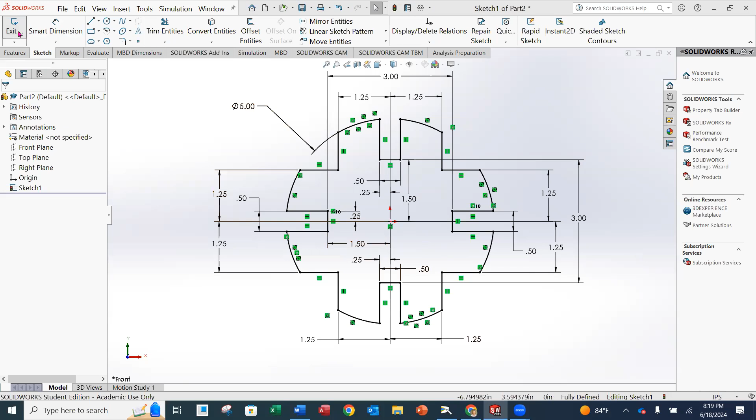Okay, I'll keep going. Okay, so now we are ready to do our extrude. So we're fully defined down here. We have all black all the way around. So now we can exit our sketch. And if you went in under the extrude command, it's going to go right to extrude. If you didn't, if you went under sketch, then you just have to reselect that sketch, go up to feature, extrude boss base, and you'll be here.

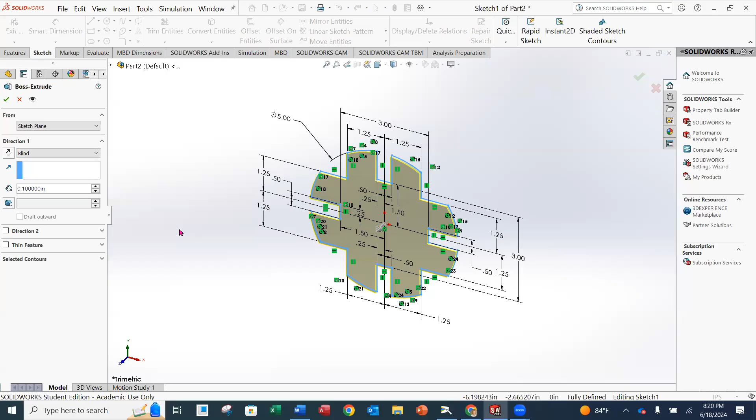So if we look back at our drawing, you're going to notice that it's 1 inch thick. So we are going to do that blind extrude, and we're just going to enter, instead of 0.1, we're going to put 1, and we'll get a preview. It looks good. And we're going to hit OK. And I'm going to select out here. And now you'll notice that we have our base feature.

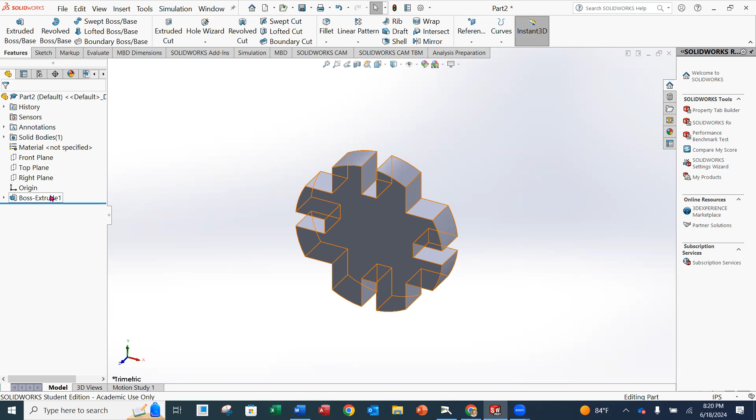So that's what I'm going to call it. I'm going to call it the base. Now you can really call this whatever you want, as long as it's descriptive of what it is. So usually the base feature is exactly that, base. So I'm going to left click on my feature, right click, and then go down to rename tree item. And then we're just going to call this base.

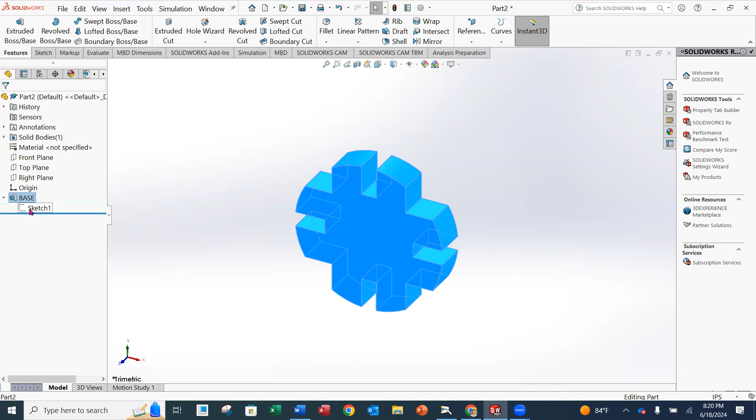Okay. And we're going to expand so we can see our sketch number 1 and that there is no negative sign in front of it. And I'm just going to left click off of the part to kind of deactivate it. So we've got our base. We've got our first sketch fully defined. I'm going to rename this. I'm going to save it for officially where I want it to go. So I'm going to do a save as, and this is called the indexing guide. So I'm going to call it indexing guide 1 and save. All right.

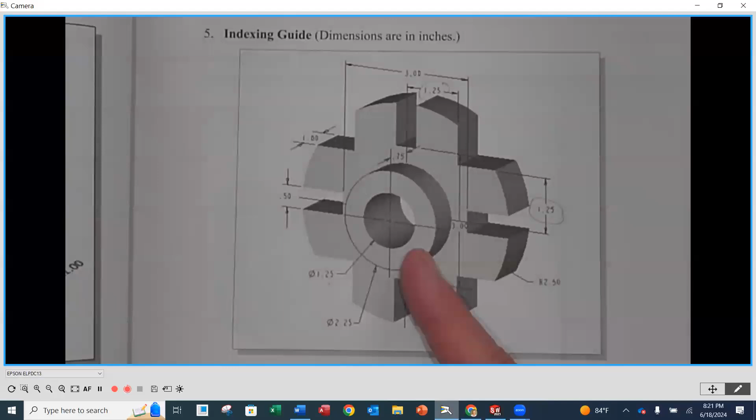So now I'm ready to do my next feature. If I look underneath, the next feature I'm going to do is going to be a cylinder that's going to be coming off of that face. And it looks like it's going to be 0.75 above that top surface. So it's a diameter, an outside diameter of 1.25. I'm sorry, nope, 2.25 to the outside diameter. So I'm going to go back to SolidWorks. We're going to do another extrude boss base because we're going to add material to create that.

We're going to select this face right here. And now we're going to grab the circle, center it at the origin. Just sketch the circle here. Hit OK. Smart dimension. Click that outside. And this is going to be a diameter of 2.25. And then OK. Fully defined because the center is sharing the same point as the origin, and it knows exactly where that is. So now we are fully defined.

We can exit our sketch. It's going to go right into extrude mode. And we want it to be a blind extrude coming off of that surface. And we want it to be 0.75. Enter. And there it is. Okay.

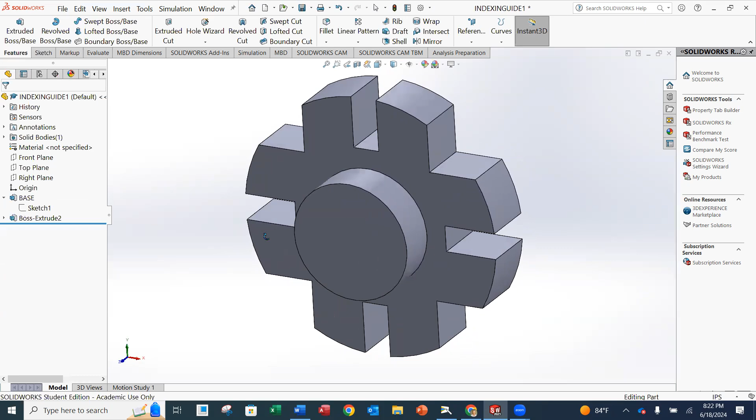Now, before we go too far, we want to expand out that feature. We want to left click on it, then right click, and we want to rename it as cylinder. I don't know, whatever you want to rename it. No right or wrongs here, just something that describes what it is. Okay. And then I'm going to do a file save.

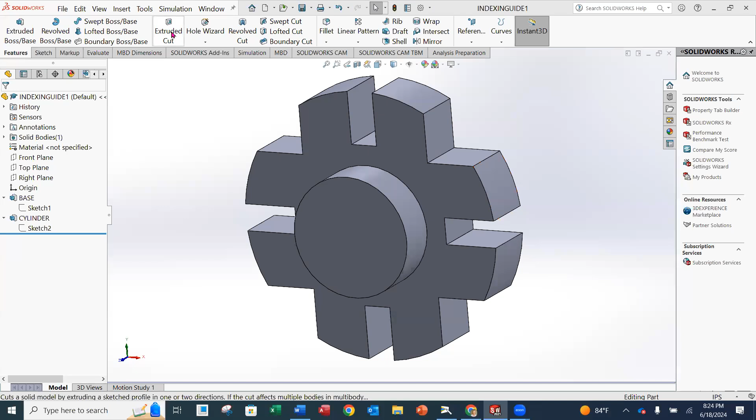Our very last feature is then going to be the hole through the center. So now if we look at the size of the hole, it's 1.25 inch diameter. We would not be able to use the hole wizard because the standard drill sizes on the hole wizard list only go up to 1 inch. So we're going to put this in as an extrude cut. So I'm going to extrude cut, pick on that top plane here.

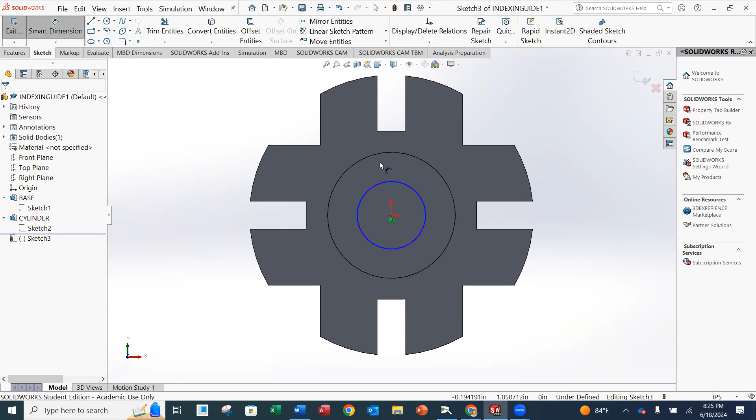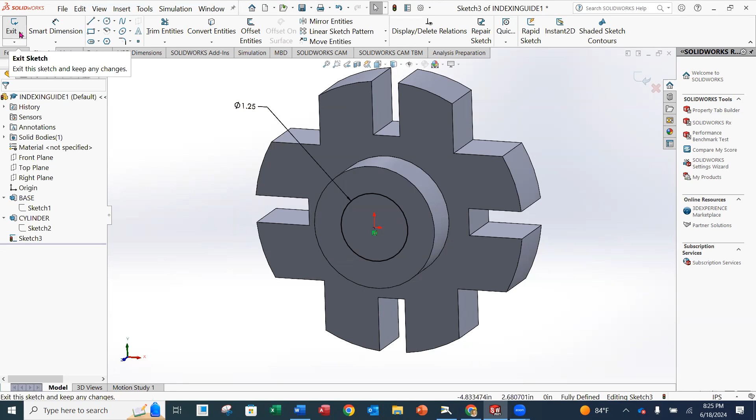Okay. And then I'm going to go to my center circle, grab the origin for its center, and then the radius. Click the OK button, smart dimension, outside. And this is going to be 1.25 diameter. And then OK. And now you'll notice if I rotate this a little bit, it's on that surface, so I'm fully defined because the location shares the same center as the origin. Then I've got my diameter of the hole dimension, so I can hit escape.

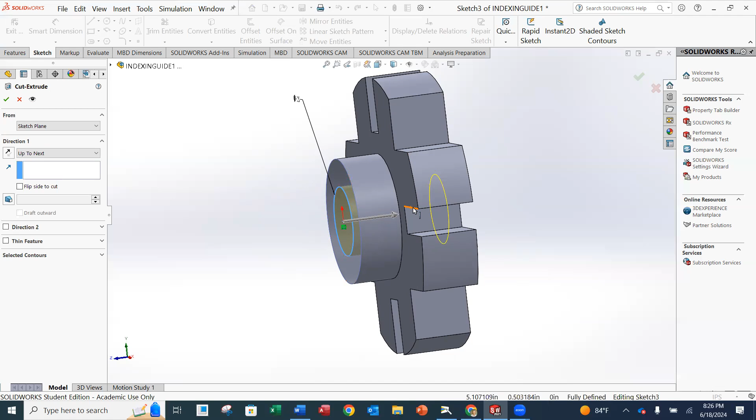And now I went in underneath the cut command. So it is saying up to next. Up to next or through all would be really the very same thing. It wouldn't. No, it's because remember we merged the results, so in this case, up to next and through all will be the same thing. But if you had intermittent steps, potentially it wouldn't be. So that's why you always want to kind of rotate it and make sure that it's there. So whether you pick up to next or through all, it remains exactly the same.

Okay, so I'm going to hit okay. And you'll notice that we now have our final part. So before we're done though, we want to expand this out, make sure it's fully defined. And then we want to left click on the cut extrude, right click to rename. And I'm going to call it the through hole, enter. And then I'm going to left click off of that. Make sure my sketches are expanded. You do not need to rename the sketches, just the features themselves.

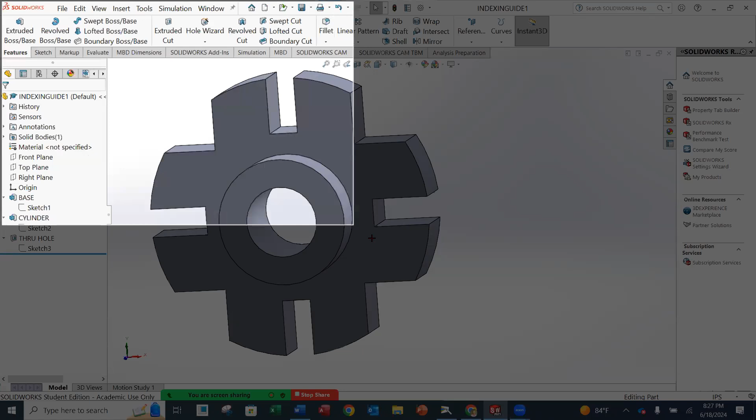I'm going to hit control, hit my middle mouse button, slide this over. Make sure you position it so we can see all the features, right? So I can see that the hole is through here, that we've got thickness. And then I'm going to do one last final save. I don't have an asterisk up here. And then I'm going to do my Windows Shift S, upper left-hand corner, and make sure that you grab your file name, and then you can add this to your Word document, or if you're using the snipping tool, you can save it as a PNG, and then that'll be what you upload to your assignment.